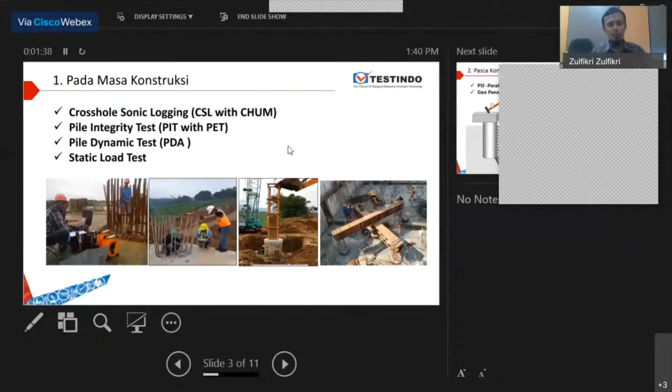Nah, pada pasca konstruksi atau untuk asesmen, pengujian tiang di antaranya dengan Parallel Seismic instrument, nanti Mr. Joraam Amir akan jelaskan. Dan juga ada yang dengan metode memakai radar atau GPR, dia akan menampilkan tampilan radar scan, dan nanti outputnya bisa menampilkan dimensi dan panjang tiang secara akurat. Nah, webinar kita hari ini akan fokus bahas tentang PIT, crosshole, dan PSI yang tadi, jadi produk dari Piletest.

Mr. Joraam Amir ini pembicara kita, PhD-nya kebetulan orang Tel Aviv, ini CV beliau. Teman-teman yang pengen minta CV-nya bisa minta ke saya. Beliau juga punya membership di komunitas internasional profesional di bidang civil engineering, dan punya pengalaman engineering yang panjang, banyak buku yang beliau tulis, banyak paper, dan pengalamannya sangat banyak di pengujian tiang ini. Produk beliau telah digunakan oleh banyak konsultan, sampai saat ini Piletest masuk market leader untuk tiang.

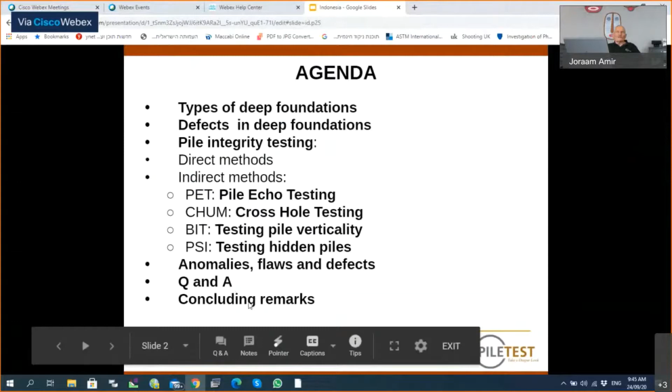I'll try to put some order in three terms that are very frequently mixed, and these are anomalies, flaws, and defects. I hope we'll have some time for questions and answers and some concluding remarks. First of all, what is a pile? A pile is a slender, deep foundation, either prefabricated or cast in situ.

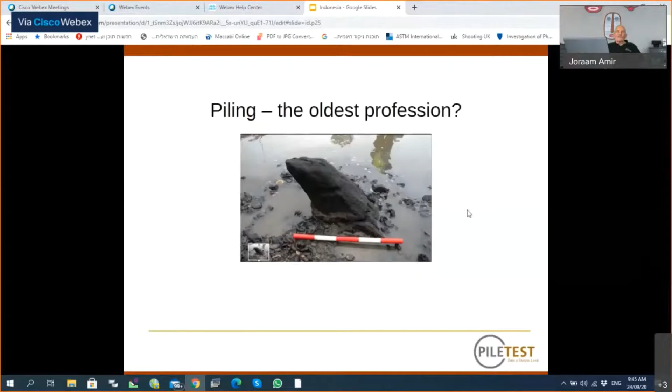I don't know what you know about the oldest profession, but I think piling could be the oldest profession. This is a sample of a wooden pile that was discovered in London, dating back more than 6,000 years ago, and it's still in existence.

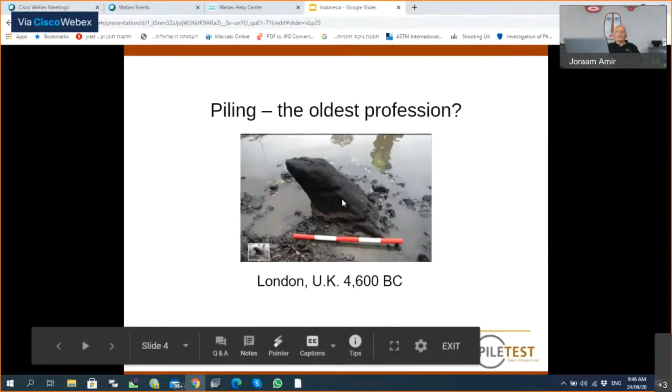Today we have not only wooden piles, but many other kinds of deep foundations. I won't deal with each kind separately here, that's a different subject. But we have two different families of piles: displacement piles and replacement piles. And honestly, all kinds of piles may have their defects.

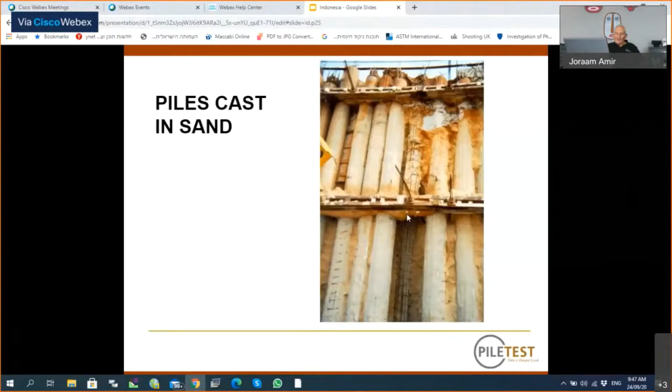Here is an example of some piles that were exposed during excavation, and you can see that the quality of these piles is not very good. At least this contractor puts some steel in the ground. Some contractors even do not put steel in the piles.

This contractor was very clever. He knew he was going to produce the piles in sandy soil, which is not very stable, so he used some casings made of cardboard. But you see that below the casing there was some collapse, and of course the pile is not good.

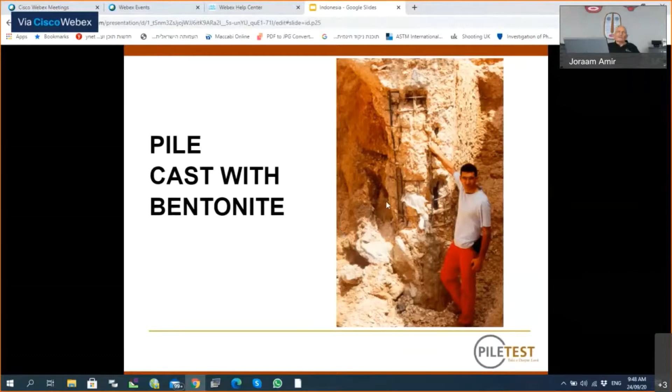Here is an excellent pile, produced by an excellent contractor. Unfortunately, the contractor didn't realize he hit a live sewage line, and the flow of the sewage water ruined the pile, which we had to repair later.

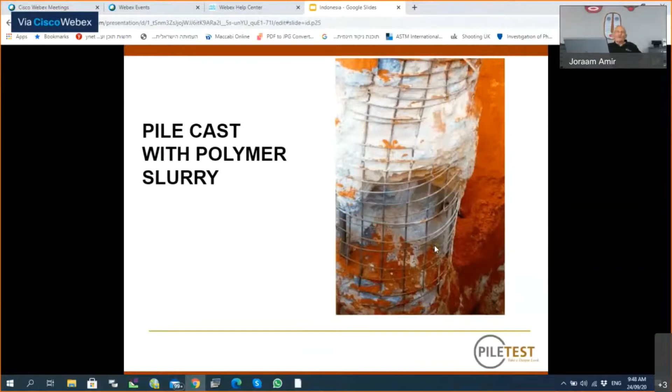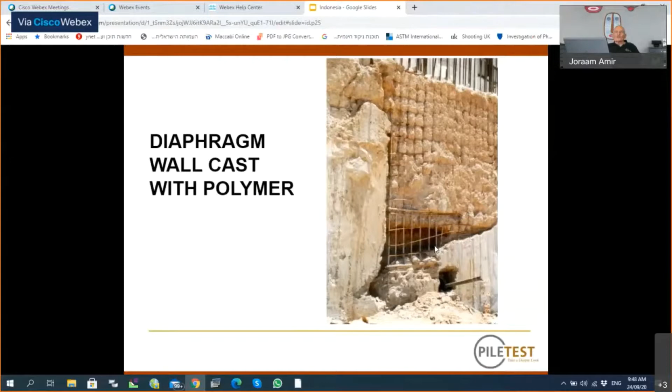Now, even under ideal conditions, when you have stable ground, hard clay, no groundwater, no chance for collapse, you can have this situation, or this one, which is almost a complete discontinuity of the concrete.

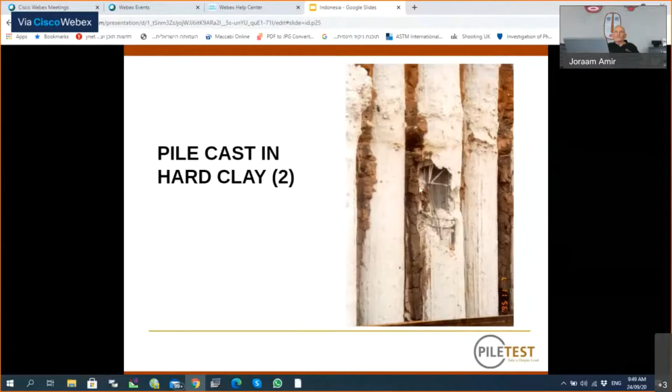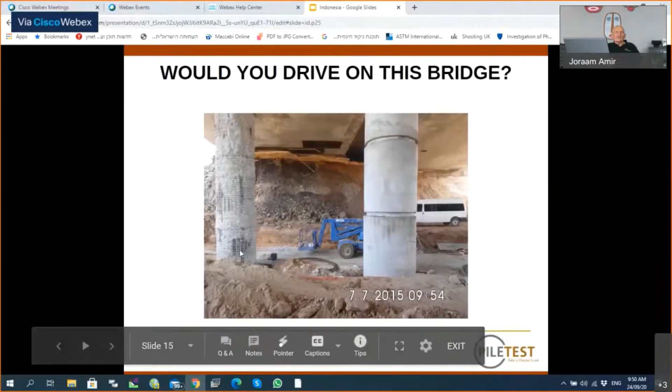Here's another example of a problematic pile. This bridge was produced top down, meaning the piles were first constructed, then the top concrete was poured over the piles, the pavement, and then excavated below. Only when they excavated below the pavement did we find that these piles, at least one of them, was of very poor quality.

Now, how much flaws or defects do we have in piles normally? I collected some information from our files and from literature. For instance, 1.7% of piles with flaws, this is from the early 70s and 80s of the last century.

Now this is a very low percentage, for two reasons. First, at that time the testing instrumentation was very rough and inaccurate, so many defects couldn't be discovered or exposed. Second, in this case the testing was done by the contractor who tested his own piles, and of course it's very difficult to be neutral and objective under these conditions. No contractor likes to admit he's producing faulty piles.

But when we go to different places in the world - California, somewhere in Asia, Italy, Israel - we see that the percentage of piles with flaws can be much, much higher, and it can be alarming.

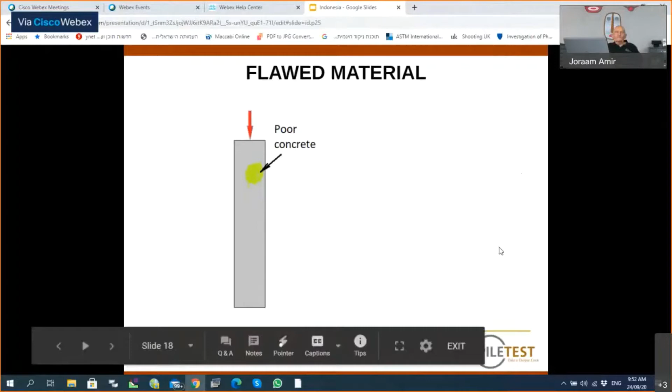Here is a soft bottom, which means during casting or some collapse, the contractor didn't clean the bottom very well, and we have the bottom, or the toe of the pile, consisting of soft clay or soft debris.

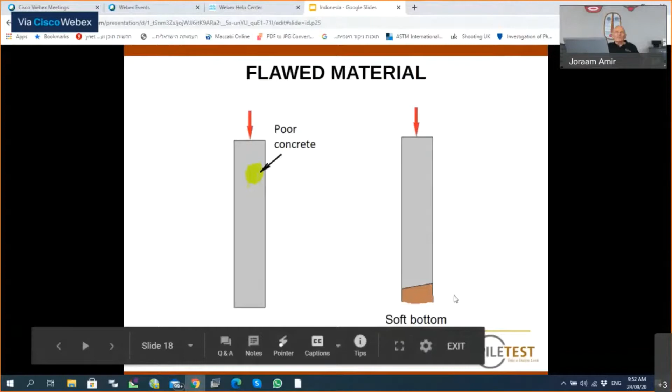Now we can have an abnormal geometry. For instance, a pile can be short, sometimes because the drilling equipment was not powerful enough to penetrate the hard soil, sometimes because the contractor didn't have a strong enough machine, or just wanted to save money, assuming he would never be checked.

Here we have necking. This is a collapse that happened during casting, and instead of concrete we have mud or some foreign material, giving an abnormal geometry of the pile. And sometimes we can have an inclined pile.

A pile which had to be vertical is not very vertical. And this is, of course, also contrary to the specifications.

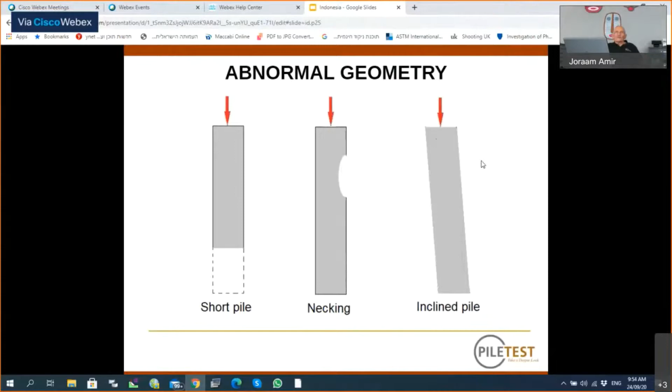We have integrity testing techniques, which I'm going to tell you about today, and they are used to discover defects before they can cause any damage. If you build a building or a bridge or any other structure on faulty piles, they can cause a lot of damage. If you manage to locate and expose these piles before you build on them anything and before you apply the load, you can avoid a lot of damage.

There are two families of integrity testing methods. The first one, and the oldest one, is excavation. If you suspect that your pile is not very sound and there may be some defects, you can just excavate around it, and sometimes this is what you discover. Of course, you must have some suspicion that something is wrong with this pile. And of course, you cannot go very deep with this method, especially if you have a high groundwater level.

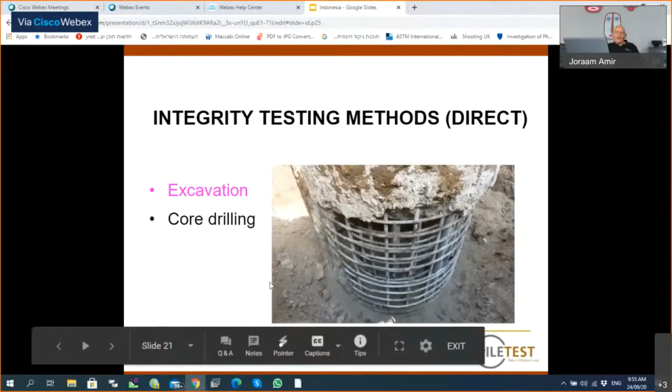The other direct method is core drilling. Here you can go very deep inside the pile and get a very good sample of the concrete. Of course, this relates only a very small percentage of the cross-section of the pile.

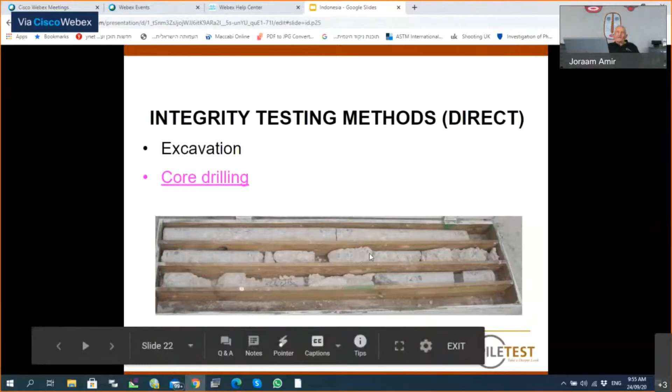In addition, we have the indirect methods. Here we have two families of methods: long waves and short waves.

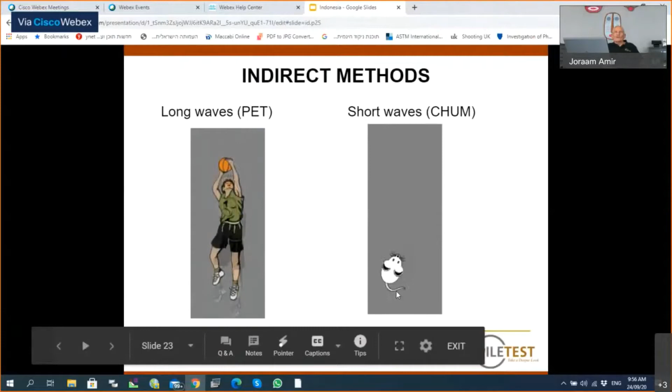On the left, we see how the long wave behaves in the pile. It can move only in one direction, either up or down. The short waves, or the ultrasonic waves, can behave like a mouse - they can go up and down, sideways, in all directions. So we have two kinds of indirect methods: the long waves and the short waves.

The first method is the sonic method, or the sonic echo. So we'll see soon a short video showing how this method is applied on site.

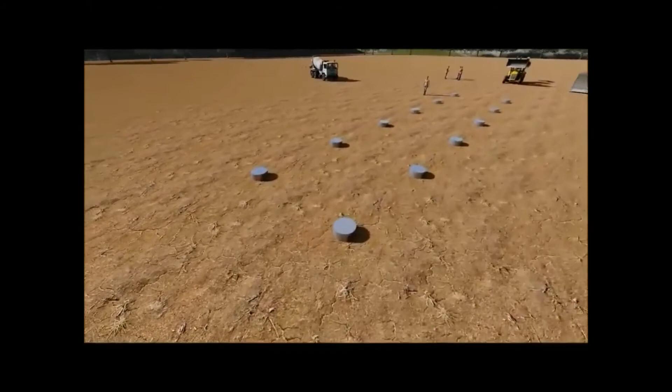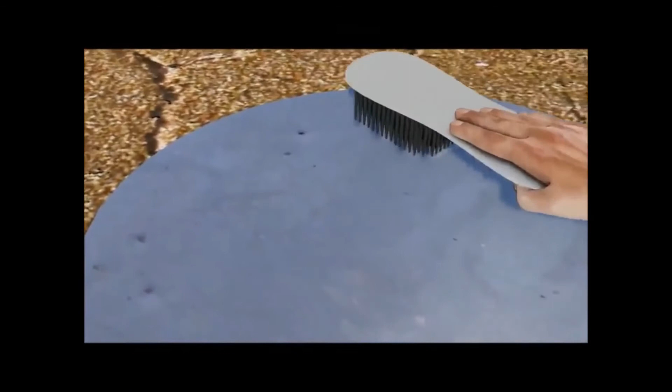PET, Pile Echo Tester, Low Strain Impact Testing. The mission: test the integrity of 12 concrete piles on this construction site. The tester goes to the first pile and prepares the top for testing. A small amount of special putty is attached to the bottom of the PET. The PET is pressed against the pile top. The top is lightly hit with the hammer.

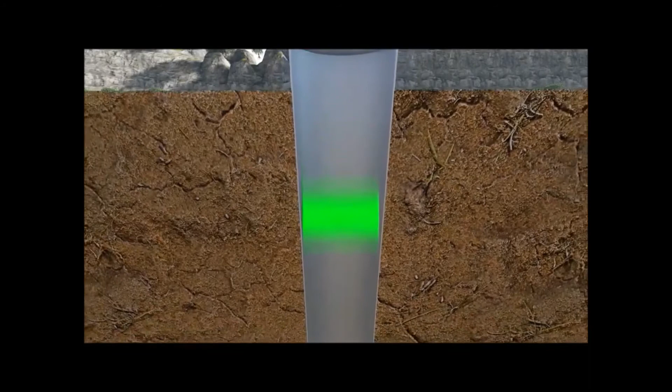A compressive wave travels down the pile and is reflected back from the toe. The blow is recorded on the screen. Good pile. The next pile has a defect that reflects the wave. The reflectogram on the screen shows a necking at a depth of 5 meters.

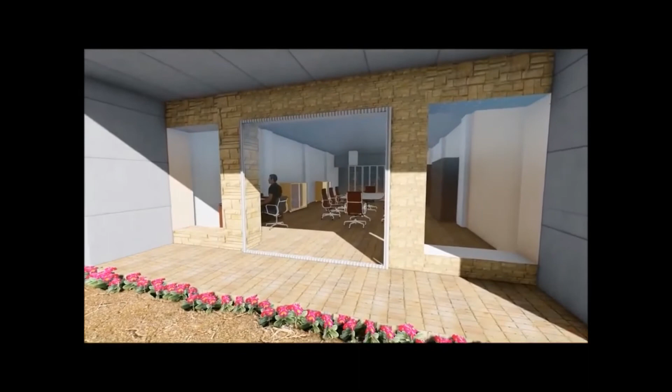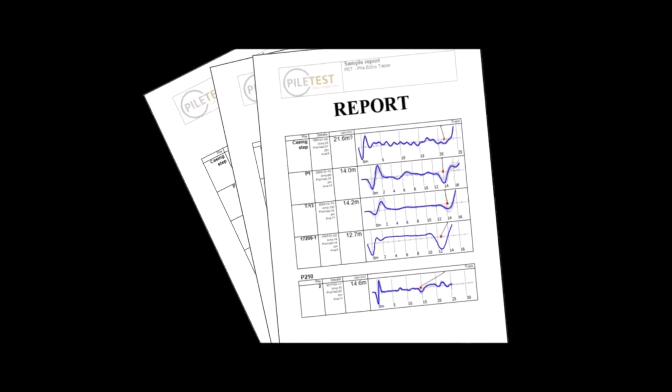The test results are now analyzed in the office and the report produced. The PET: your compact yet powerful tool for testing the integrity of deep foundations. Thank you.

This, in short, is the long wave method, the PET. The instrument works very well with a smartphone as a data logger.

So what you see here can be a smartphone or a tablet. And if you have a smartphone, you can use all the other properties of the smartphone - for instance, take a photo of the pile, the top of the pile, or register the GPS coordinates of the pile. And of course, you can save the results in the cloud, and therefore they can reach the main office on the other side of the globe immediately. So you don't have to wait for the results until you return to the office.

Now I'd like to present to you the PileWave program. This is a program that simulates the test.

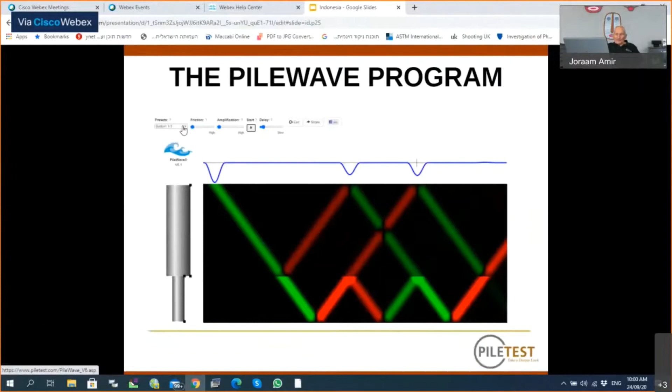Here is a sound pile. This is the time axis, and this is the depth. You see that the wave caused by the hammer blow goes to the toe of the pile. It is a compressive wave, and it is returned, reflected back as a tensile wave, and pulls the top of the pile a little bit down.

Now, what happens if we have some necking - a smaller cross-section? We can show this with our mouse.

Now we have a pile with a small defect close to the bottom. What happens if we hit it? Press start. You can see that because we lose a lot of energy passing through this defect, the toe reflection here is very weak. So we can apply some amplification.

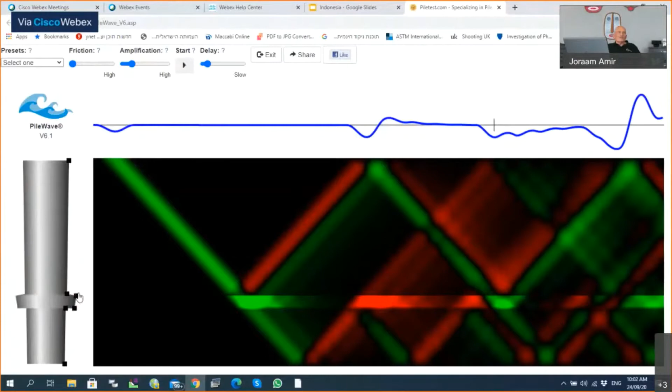On the other hand, if we have a bulging here, you see a larger section, because here we had some collapse during drilling before we poured the concrete. We press start. And here we have a very nice toe reflection, and we see that now this graph is going first up and then down, which means that we have a larger cross-section.

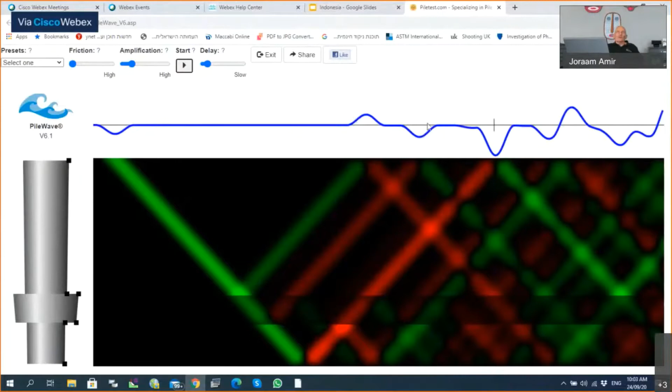Now, the PileWave program can be run on our website. It's free for all, and it's a very good education tool. That's it.

Please be patient, just a moment. As I said, high tech.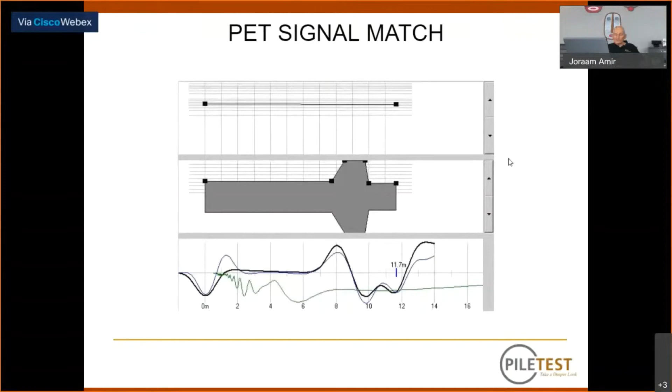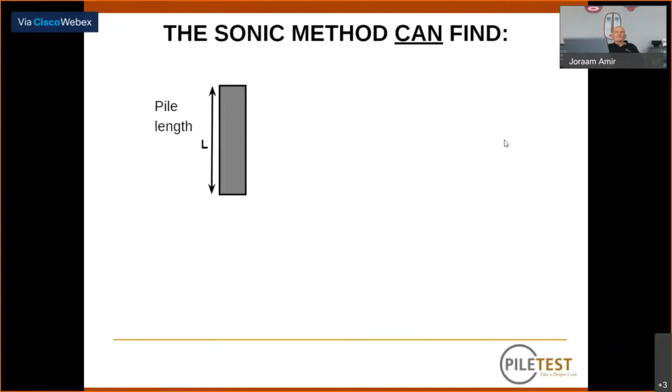This method can find the length of the pile, inclusions of foreign material, horizontal cracking if there is any, and joints and staged concreting. If you pour the concrete, wait some hours, and then continue concreting, you can have some separation here. Large, abrupt changes in cross-section, like this, and distinct changes in soil layers.

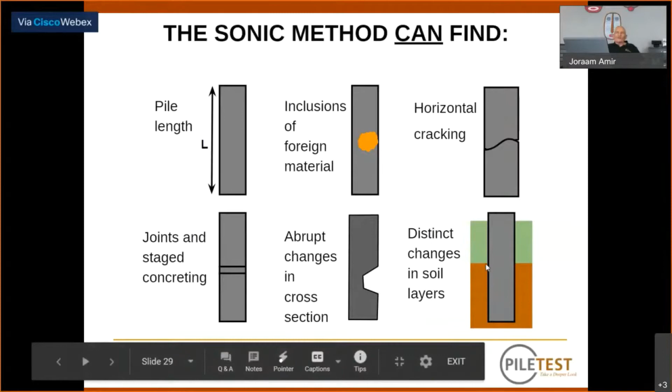This really is our biggest problem. If, for instance, the pile is cast in ground and then penetrates rock, the rock will produce a different kind of toe reflection.

Advantages of the sonic test: first of all, it's quick, it's inexpensive, it's universal. It can be used on concrete piles, wooden piles, even steel piles in certain cases. And there is no pre-selection because you don't need any special preparation. You can test any pile.

The problem of the PET, and all other instruments operating on the same principle, is that there is a limit to the depth to which it can penetrate. The limit is determined by the slenderness ratio, L, the length of the pile, over the diameter.

With an SPT of 5, standard penetration resistance of 5, soft soil, you can test piles up to 40 to 50 diameters deep and still get reasonable results. Of course, if you have an SPT of 30 or 40, you cannot go deeper than 25 or so diameters into the ground.

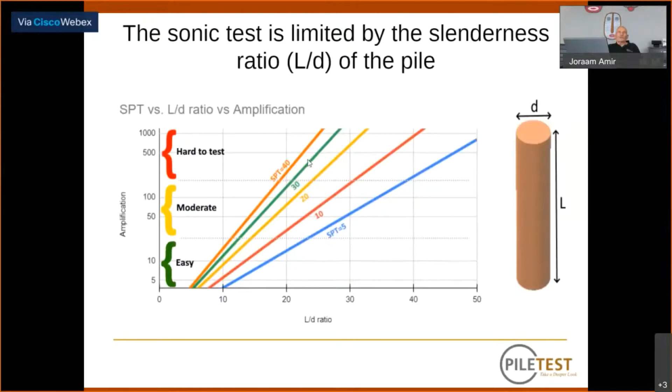This is a very interesting graph, the test duration in this method. The method, as I said before, is very fast. In 30 seconds you can test about 65%, or two-thirds, of the piles within 30 seconds net, not counting the time it takes to move from one pile to the other.

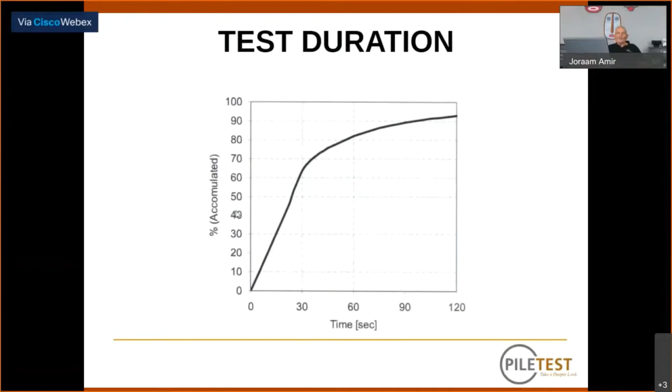And you can test 90% of the piles in less than 2 minutes. These results are taken from about 70,000 piles from all over the world. So the method is very fast.

There are situations where sonic testing, or the PET, is unsuitable at all. For instance, if you have large piles carrying heavy loads, in this case your method using long waves is not accurate enough—it doesn't have the resolution you are looking for. Here is another example where you cannot use this method.

Sometimes when you have to produce piles inside an urban area in time, the site is very small. You cannot move around very well with the drilling rig. So what you do is start drilling the piles from the street level here, and cast them only to the basement level. Then you can start drilling, and you don't have to operate your large drilling rigs inside the crowded basement. Of course, this kind of pile cannot be tested with the PET.

Here is another example: if we have rocky terrain, above which we have fill made out of rock particles, the rock particles produce a lot of reflections. The rock has a lot of friction, which prevents the penetration of the signal.

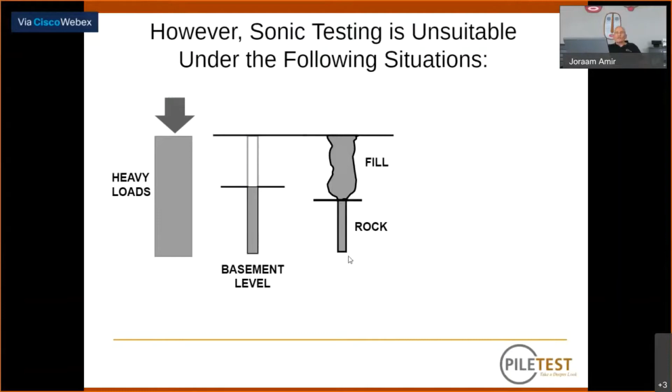And this is another example, a diaphragm wall. A diaphragm wall is not a one-dimensional element, so the theory behind the PET doesn't apply to diaphragm walls, and we have to use a different method.

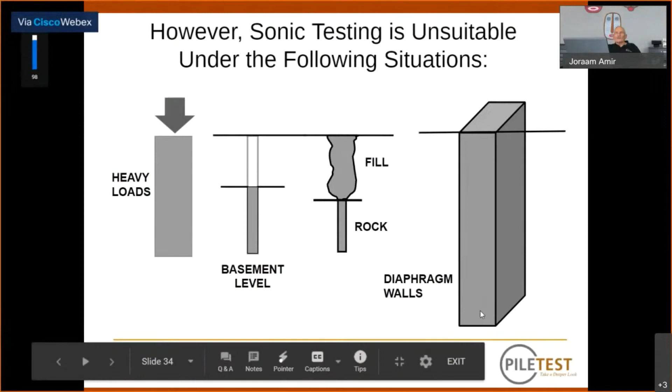The different method we use here is the CHUM, which we'll see soon in the video.

On this site, large diameter bored piles were constructed. On the surface, they all look perfect. But are they? CHUM, compatible with ASTM standard D6760, looks for subsurface imperfections through the access tubes installed.

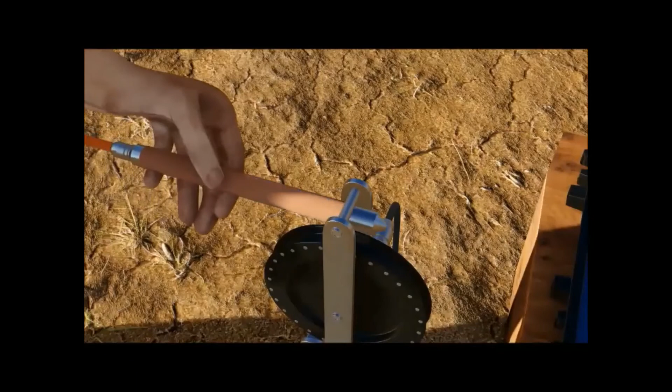Depth meter pulleys are placed on top of the water-filled tubes. Ultrasonic dual-function transceivers are lowered into the tubes, and lowered together all the way to the bottom, which may be 100 meters below ground level.

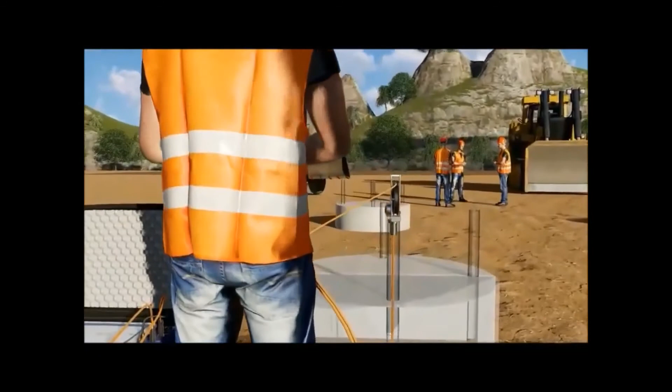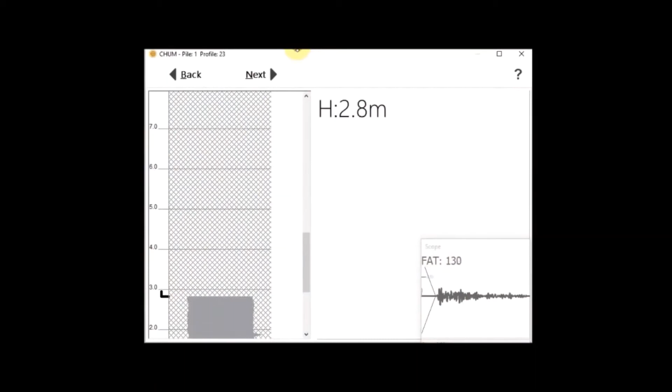When the sensors are level, the computer connected to the CHUM gives the order to pull. While both cables are pulled together at a speed of up to 2 meters per second, the location of the sensors is shown on the screen in real time. Ultrasonic pulses are continuously sent from the emitter to the receiver, and anomalies such as increased arrival time or lower energy are immediately displayed. CHUM automatically adjusts signal gain for optimal signal quality under variable conditions.

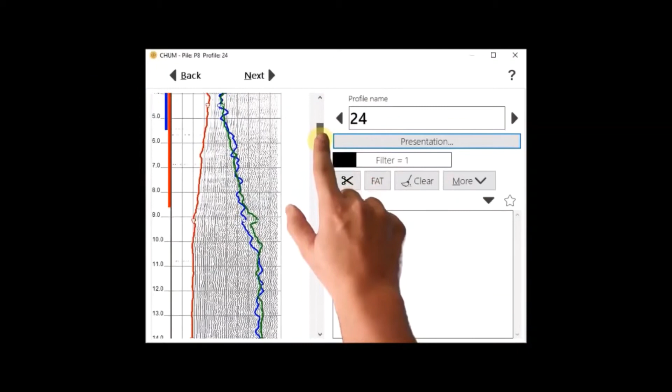CHUM also supports 2D and 3D tomography. Both sensors exit the access tube together, and the ultrasonic profile is already on the screen: first arrival time, relative energy, wave speed, and the waterfall presentation. Other profiles are logged the same way.

The data is analyzed by the engineer, who checks for any inconsistencies, adds his comments, and prints the report.

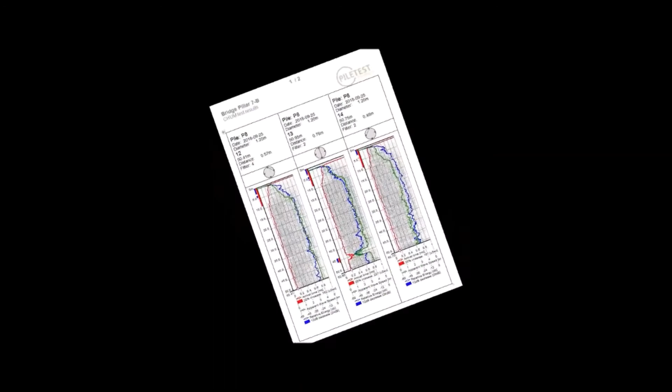This, in short, is the CHUM, our Crosshole Ultrasonic Monitor. It is portable, rugged, and productive. Due to the use of a detached computer, the CHUM will never become obsolete. Thank you.

By the way, when saying rugged, I recently saw a system which we sold 10 years ago, and it's still in action, working every day of the week, 5 or 6 days a week, for 10 years. So it's pretty rugged.

Now, what are the components of the system? Of course, we have the access tubes in the pile. We have the CHUM and the computer.

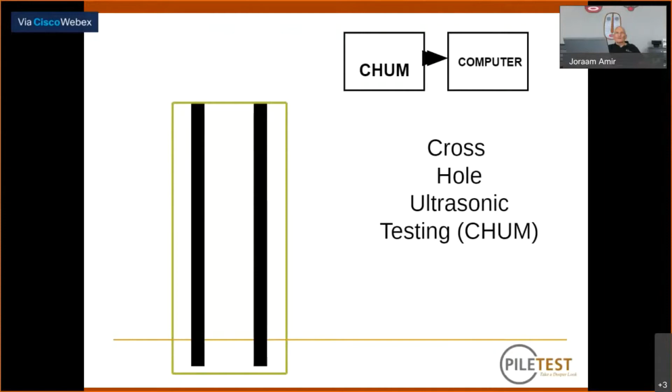By the way, all our systems have a separate computer, not embedded in the CHUM. Therefore, after 10 years, the CHUM can use a new computer, while all other systems that are 10 years old have a computer that long ago stopped functioning. We must have a depth meter to monitor the depth of the sensors, which we have hanging from the cables.

Now, after reaching the bottom, we pull both emitter and receiver together.

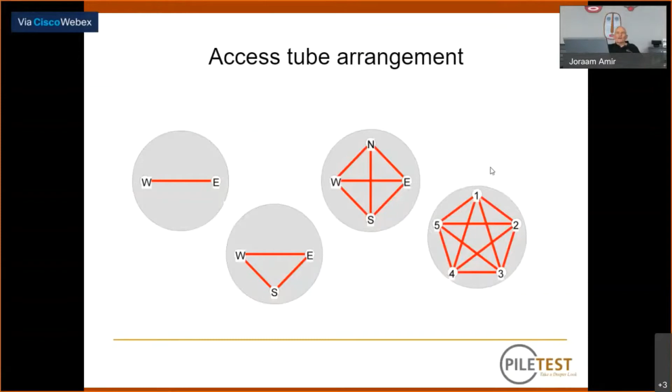Now, how many access tubes do we need? If we have a small pile, we don't have room for more than 2. A larger pile, 3, 4, 5. I even saw some very large diameter piles, 3 to 4 meters in diameter, huge piles with up to 10 access tubes.

ASTM standards say you use 1 tube for each 30 centimeter diameter. So if you have a 1 meter diameter pile, you need 3 tubes; for 1.5 meters, 5 tubes. In the Far East, meaning China, Vietnam, Malaysia, they normally use 4 tubes regardless of diameter, even on very large piles. I don't know what the situation is in Indonesia.

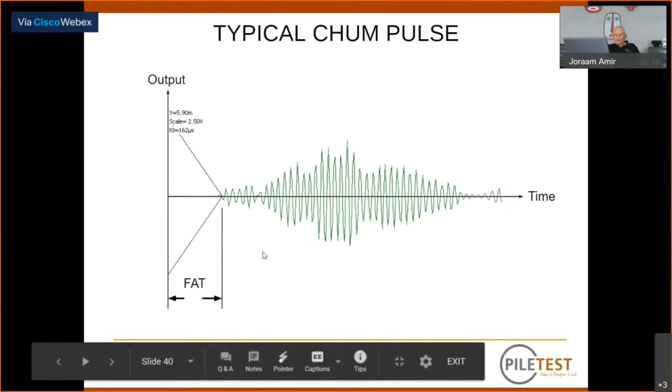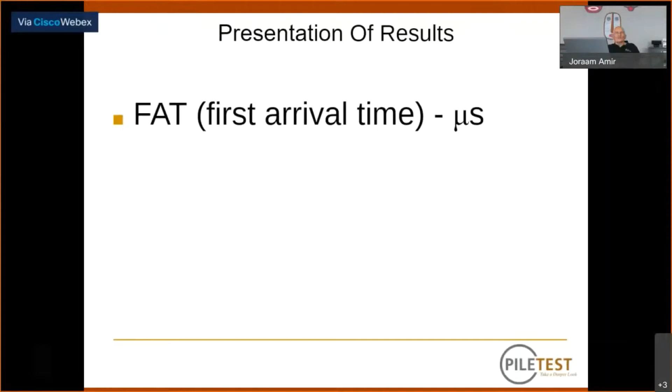How are the results presented? First of all, as I said, the FAT in microseconds, and the relative energy, an important parameter. We can calculate immediately the apparent wave speed if we take the separation of the tubes and divide by the time. And we have the waterfall presentation. All these are requirements of the ASTM standard.

Here is a typical result. You can see immediately the red line is the FAT. At this depth, between 3 and 4 meters, the FAT becomes very large, while the blue line, the relative energy, becomes very small. This means that at this depth we have a discontinuity or a defect.

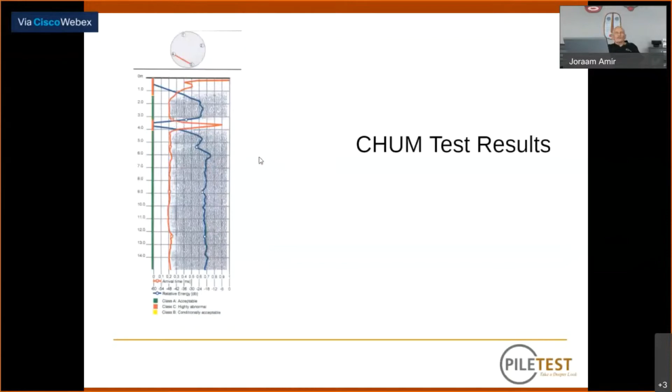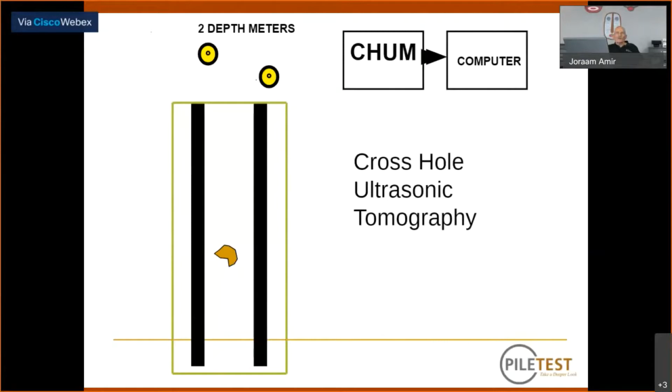Now, if we want to know more about this defect, we can do a tomography. Tomography means looking at the defect not only in the horizontal direction, but also from diagonal directions, above and below. Then we can plot the shape of the defect on the screen. In this case, the system is the same one, but we have to use 2 depth meters, so the system will know at each moment where each of the sensors is.

Now the system also provides a utility for calculating a 3-dimensional tomography, where we take the results of all the tubes and combine them to get a 3-dimensional picture of the pockets of foreign material, or defects if you like. We can have a horizontal cross-section at any desired level, and a vertical cross-section in any direction.

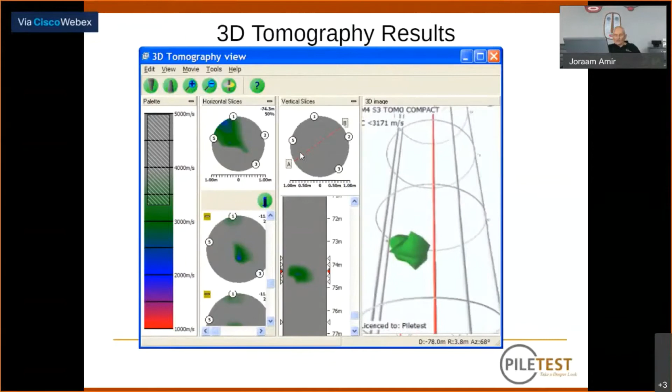Now a few words about three terms that are very often misused: anomalies, flaws, and defects. I must admit that even experienced testers and engineers with a lot of experience do not know the difference.

Here are the definitions. An anomaly is any irregular feature in the non-destructive test results. An anomaly can be due to testing instruments, like noise, misuse, or access tube debonding.

If you use steel access tubes, normally you don't have a problem. But in America, they like to use plastic access tubes, and the plastic PVC tubes don't adhere too well to concrete, and there is some debonding. Even a millimeter separation between the tube and the concrete creates an anomaly. And as we said, surrounding soil can influence the results of the test. Of course, the anomaly can also be the result of an actual flaw or defect in the pile.

So not every anomaly is also a flaw. What is a flaw? Any deviation from the planned shape or composition of the pile which does not necessarily detract from the pile's performance. So if you have a very small clay pocket close to the bottom of the pile, and the pile is a friction pile, not an end-bearing pile, this may be a flaw.

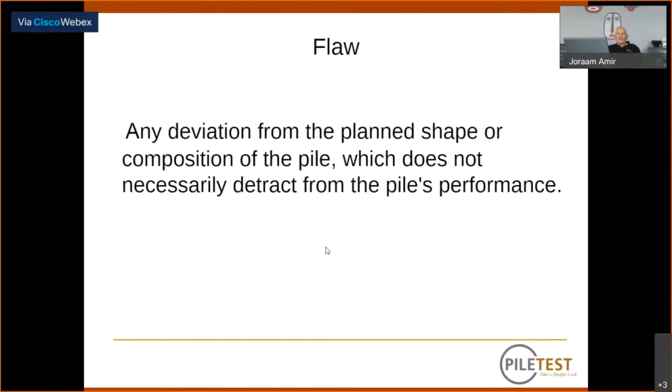It does not detract from the pile's performance, and that's very important. On the other hand, a defect is a flaw that, because of either size or location, may affect the pile's capacity or durability. So if you have a large flaw close to the top, where the stresses are highest, you can have a defect.

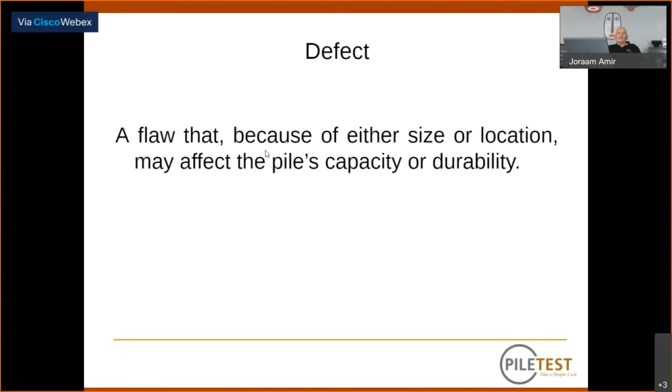Now, what do we do with flaws and defects? The test laboratory is responsible for reporting all anomalies, and for assessing which anomaly comprises a flaw. The geotechnical and structural engineers are jointly responsible for deciding which flaw comprises a defect, because they know what the pile is supposed to carry and how it's supposed to function.

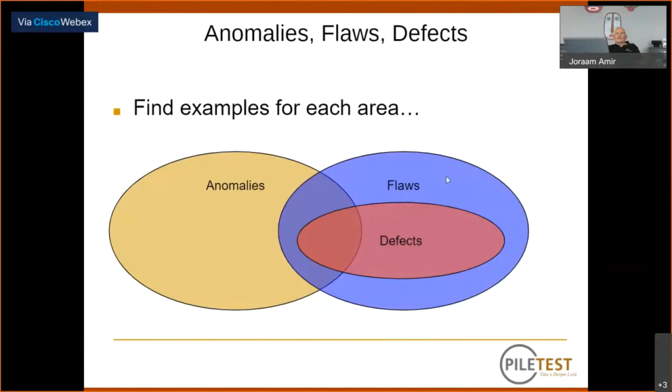Here's something called a Venn diagram. With our testing, we have a lot of anomalies. Some of our anomalies are due to irregularities in the pile, and they cause flaws - the blue area. Not all flaws are defects. Some of the defects are as defined by the engineers.

The next item, a very recent and modern technology, is the BIT - the borehole inclination tester. The BIT is a universal instrument for testing the inclination of piles, bored piles, even driven piles, and even sheet pile walls can be tested with the BIT, using suitable access tubes.

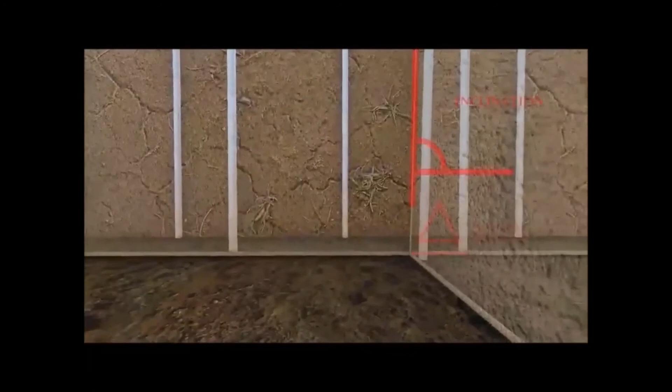The square pit is surrounded by diaphragm walls. The wall elements were cast with access tubes for crosshole ultrasonic testing. The walls are 30 meters deep. Are they vertical? The BIT sensor and centralizer are lowered into one of the tubes.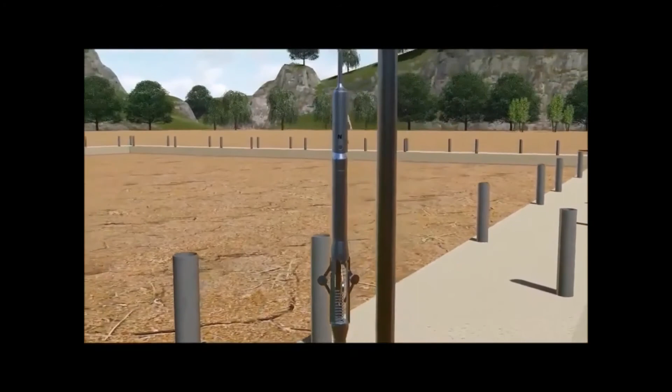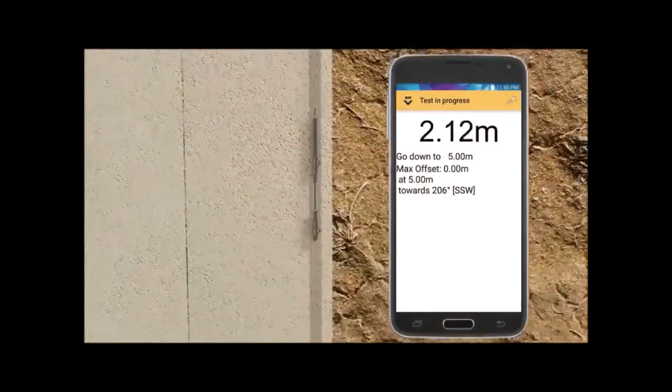The BIT is lowered to the first stop at 5 meters. With the stop sign switched off, the BIT is lowered to the next stop. The procedure is repeated all the way to the bottom. The BIT is now raised, stopping at the same stations. The BIT is now at the surface for final reading.

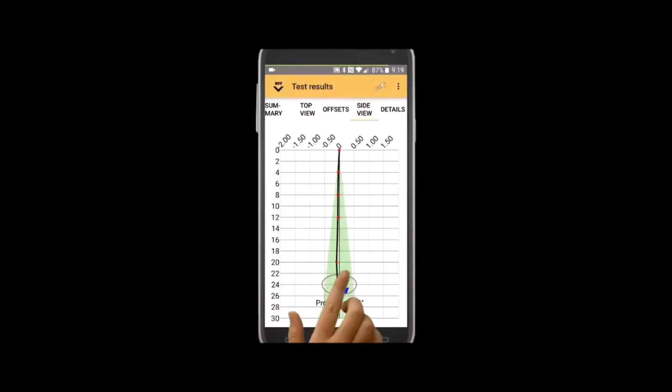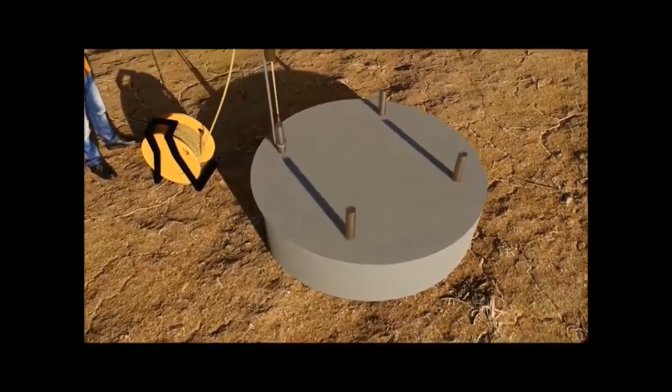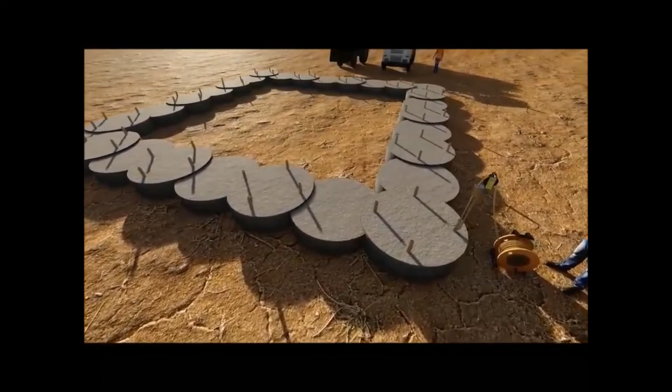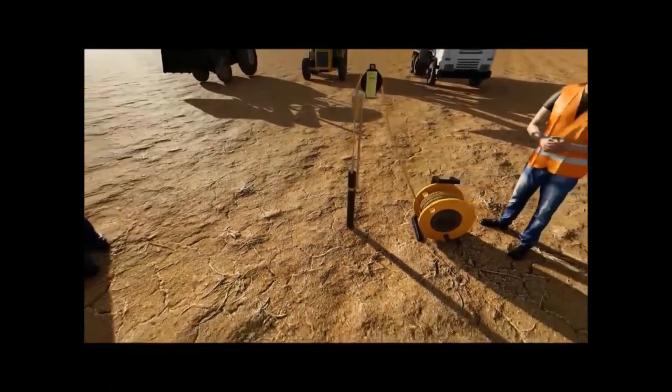The top view is now seen on the screen. The side view is plotted on the screen in the desired direction. The deviation of bored piles is measured the same way. The verticality of secant pile walls is of utmost importance. The BIT can also test simple low-cost tubes for geophysical testing. Thank you for watching.

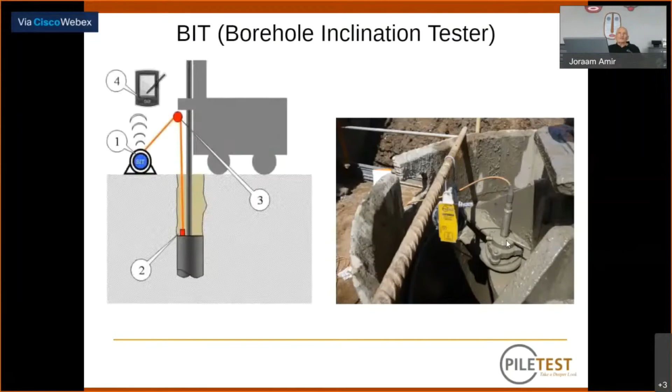For diagonal shafts or piles, 4%. Here is the bit mounted on top of a drilling bucket. It is, of course, waterproof, mud-proof, and here the bucket, while it goes inside the hole, acts as a centralizer and makes the bit follow the axis of the pile. Here you see the drilling bit, the drilling bucket, with the bit mounted on it.

This is the instrument, the automatic depth meter, and this is our smartphone in our pocket that runs the whole operation, stores the data, and transmits it to the cloud if necessary.

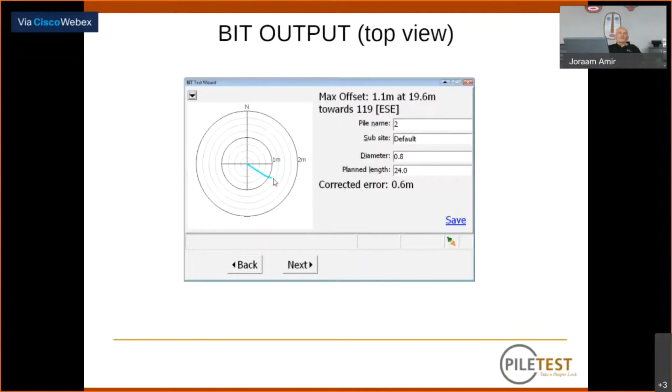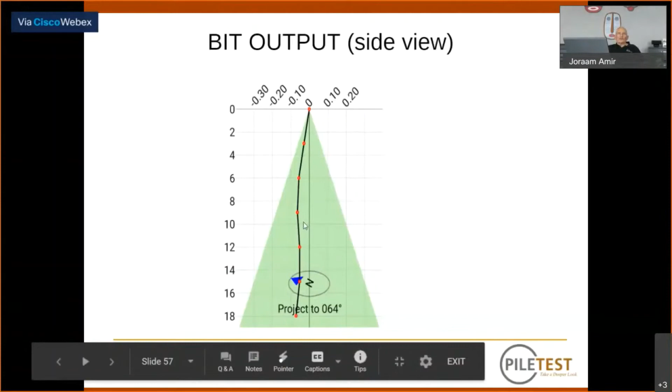We get the output. Here is a top view. We see that the axis of this specific pile or tube goes to the east, southeast. We have a side view in any direction. The green area is the allowable inclination of 2%. So you see that at 14 meters, we have 28 centimeters, which is allowable as long as our axis is inside the green area. The pile is acceptable.

The last system which I'm going to present to you is the Parallel Seismic system, the PSI, to determine unknown and unseen piles.

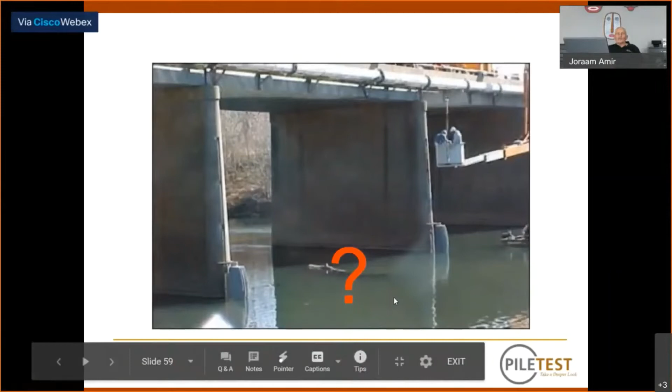Here you have a bridge. We have a discussion in our office if this is a crocodile or just a piece of floating wood. But of course, this bridge is founded on certain foundations. We don't know what kind of foundations there are. They may be deep foundations, they may be shallow footing foundations, we don't know. So the PSI, the parallel seismic method, is supposed to check the depths of these piles.

Here is our PSI system. We have a hammer with an impact switch connected to the instrument. Here is a hydrophone, the automatic depth meter, and all the electronics are inside the cable reel. Here is how it's operated.

You hit with the hammer on the superstructure. Even if you don't see the pile, you hit any point of the superstructure. The waves go down inside the foundation or the pile. From it, they are deviated into the ground and to the access tube, which is filled with water. This is the hydrophone, which is sensitive to changes in water pressure. And the instrument, or the computer, monitors the depths from item 3, the depth meter, with the waves which are recorded by the hydrophone.

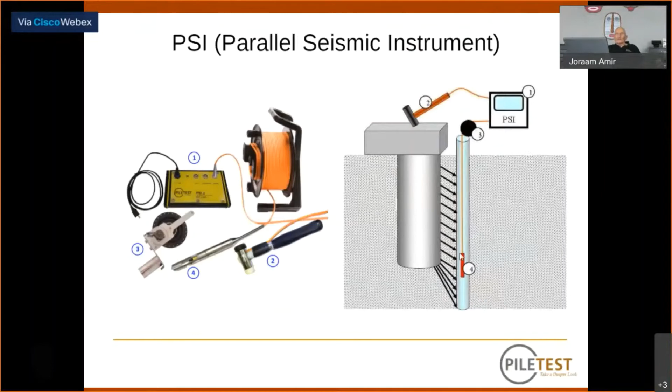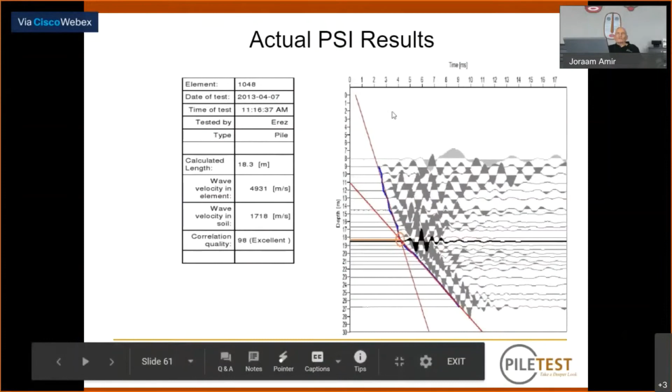This is the plot we get. You see that these are the first arrival times, which are arranged very nicely on a straight line. And from this point onward, here, there is a break in the slope of the line. This is exactly where the toe of the pile is, at 18.3 meters depth. So you can test piles even if you don't see them at all.

And some conclusions. First of all, in piles, defects may and therefore will occur. So I hope you didn't have any illusions until today, but if you have, you can forget your illusions. There are defects. Moreover, innovation in piling is usually accompanied by an increased defect rate.

When you bring a new technology to a country, in the beginning, until engineers and contractors master the method, there may be more defects. Integrity testing techniques, which I've presented to you today, are used to discover defects before they can cause any damage. And 'before' is a very important word here. Discovering damage after it happens is not very good engineering.

Current integrity testing techniques can discover most important defects. Unimportant defects, if they are not discovered, do not interest us too much. And I must admit, sometimes there are defects that cannot be discovered because they are too deep in the ground, or because our most modern equipment is not capable enough.

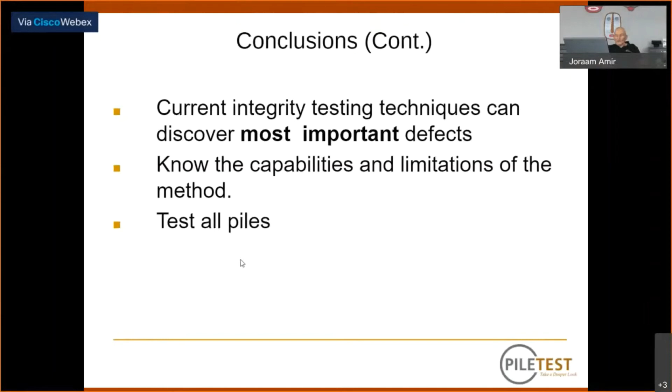Of course, you must know the capabilities and limitations of the method you use, and, very important, test all piles. Some engineers specify testing 10% of the piles, or 20%, or 50%. This is very poor methodology. You have to test all piles. And I showed you with the PET, the pile echo tester, that testing is very fast. The testing, therefore, is also very inexpensive. So we encourage you to test all piles.